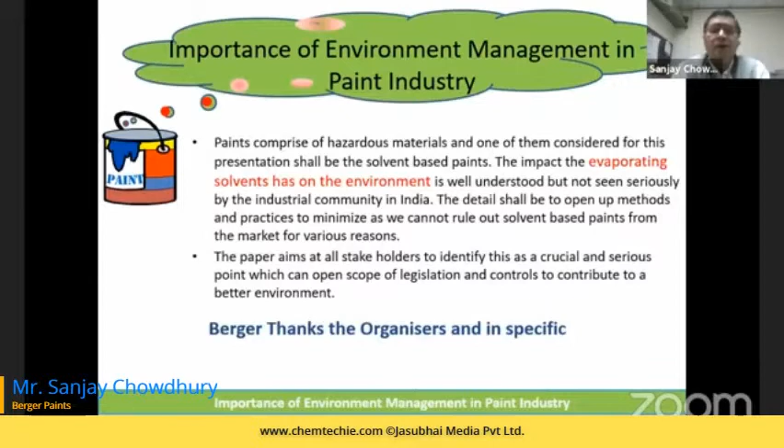In the paint industry, paint comprises hazardous material - the four ingredients, everything is hazardous, and it impacts the environment through solvents and other factors. We all know this, and now people's awareness is gradually increasing. As far as the Indian context is concerned, we are trying to remove all lead chrome based products from the paint formulation. We are moving away from that.

We are basically moving towards high volume solid products with less solvent evaporation, with low VOC, high VS products. There are also a lot of changes happening by reducing paint consumption using a high DFT single coat product, which reduces the number of coats needed. Another approach is innovation in application - using one coat or avoiding some coats while giving a similar finish to multiple coats. This leads to value innovation and protection of the environment. So the importance of paint and its impact on the environment has been discussed in this presentation.

Apart from that, we also need to understand that we do painting not only for beautification, but the main objective is protection of the surface from corrosion. The latest thumb rule is that 3 to 4% of India's GDP is being wasted due to lack of knowledge in non-mitigation techniques of corrosion.

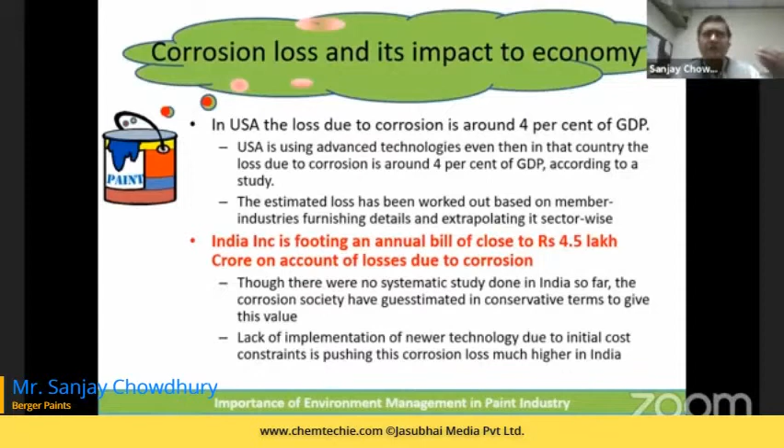That understanding is gradually coming through this type of forum and platform, where interaction is happening and people's awareness is gradually increasing.

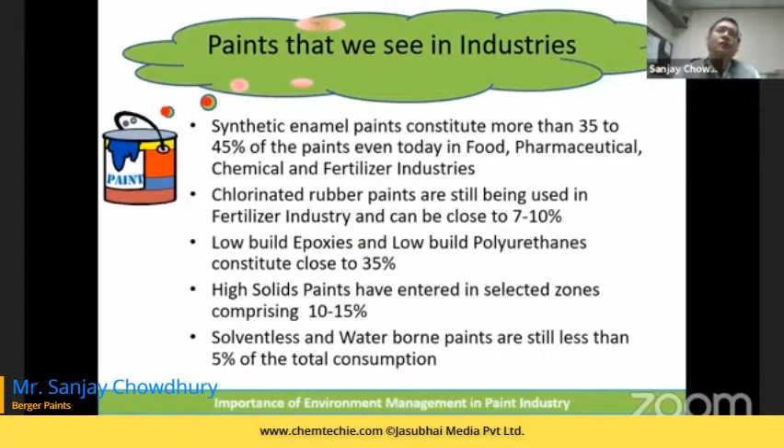So there is immense scope, tremendous awareness, and of course cost impact is also there. The Indian market is highly cost sensitive, and hence we have to seriously think about how to make it viable, affordable, and executable. So the paint industry is expected to grow.

Generally in India, paint growth is around 1.5 times the GDP growth. Till now, we have grown to the extent of 12 to 15% annual CAGR over the last 5 years, and there is a big amount of investment happening in this particular area.

Where there is a structure, there is corrosion; where there is corrosion, there will be painting; where there is painting, there will be solvent; and where there is solvent, there will be a chance of pollution in the environment. Hence we have to work together.

We have to understand and change the specification. We have to work towards the specification, and also take up with the government that this is a long term and sustainable solution, and hence we have to focus on that. Sometimes regulation also needs to be set, specifying how much VOC and other things must be there, without which it will not be allowed.

Some stringent norms, if supported by the government, will hopefully bring some changes in the industry. So paint basically comes under the red category because it consists of a lot of environmentally polluting components inside it, and hence we have to be very careful about what type of paint and what type of solvent we use.

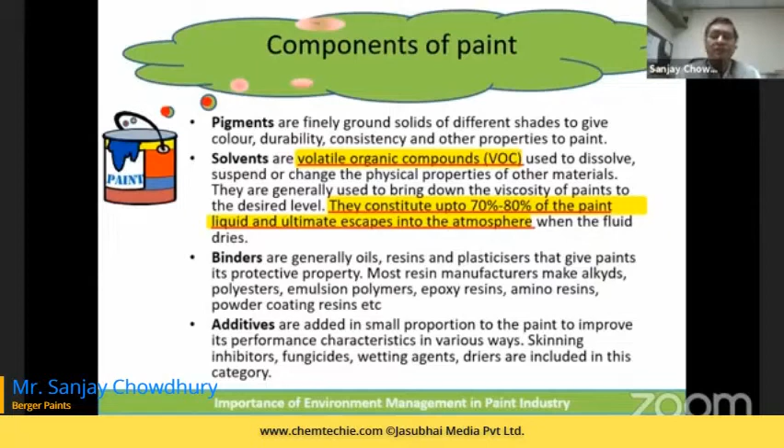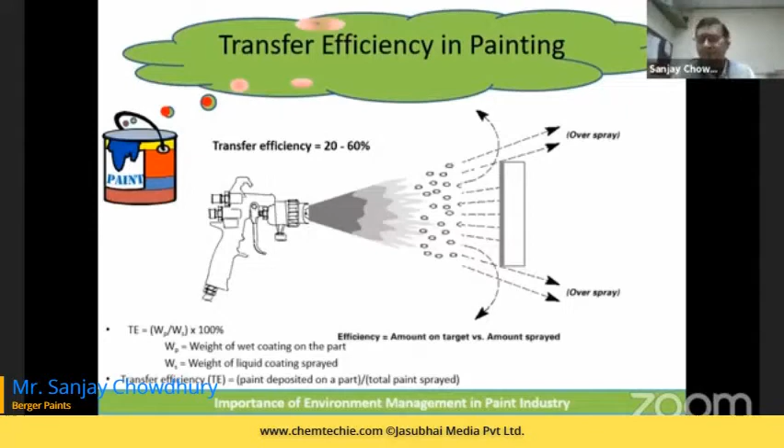Apart from the paint composition, whenever the paint is applied, how it is applied and what is the transfer efficiency, application will also play a very critical role. We have a very strong impact on the application side as well.

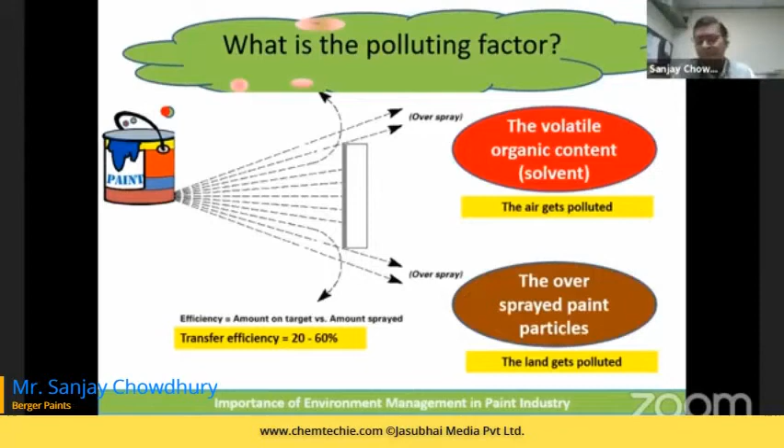So what is that factor? Basically, volatile organic compounds pollute the air, and second, the overspray of paints pollutes the land. We have to be careful handling both by using less solvent and better application technology, which will help get the land less polluted.

So these are the overall impacts: how of 100 kg of paint, 50 kg is paint solid on the workplace, and more than 50 kg goes onto the air and earth. If it is controlled, that can be managed. This also has an ozone effect.

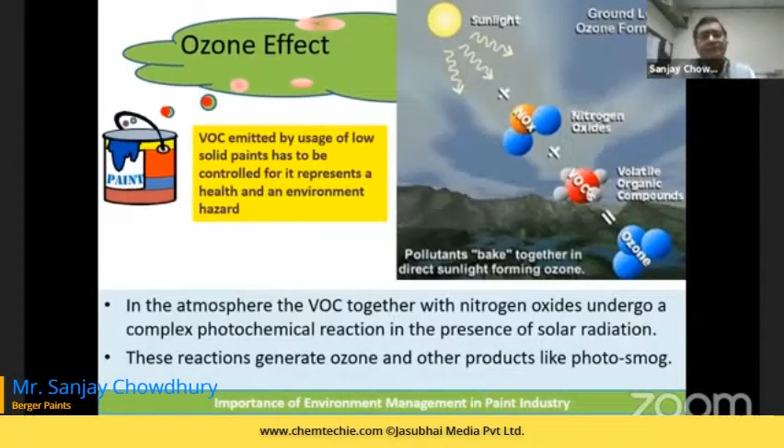The VOC emitted by usage of low solid paints has to be controlled due to its health and environmental hazards. In the atmosphere, VOC together with nitrogen oxide form a complex photochemical reaction, which is the reason for the ozone effect, which is a very dangerous thing. Hence we are all working towards addressing this.

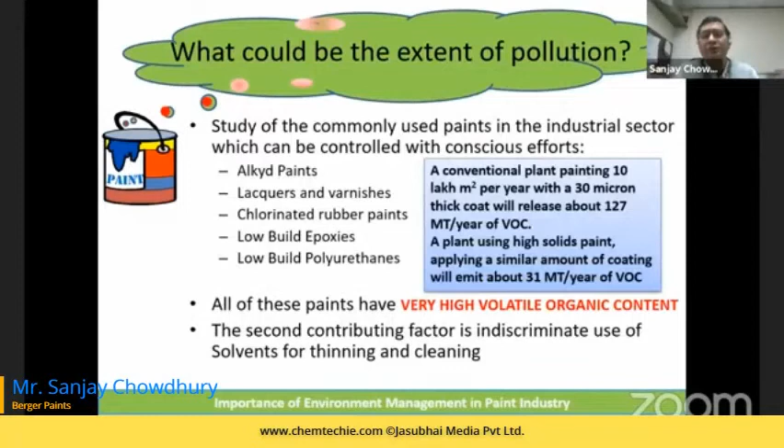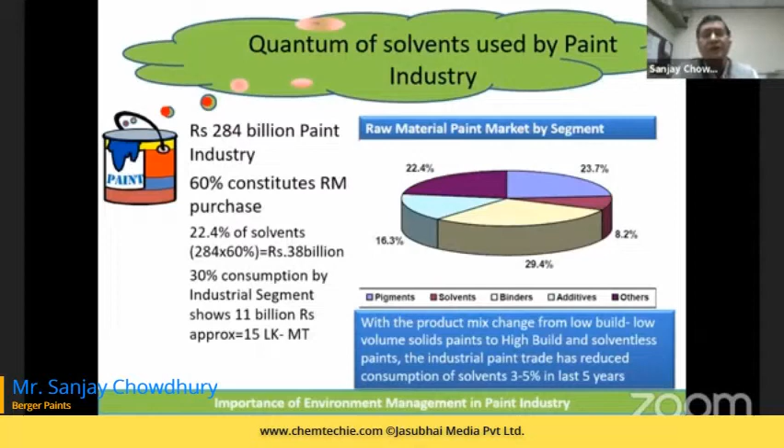We are working towards high solid, low VOC products. By and large, in the 284 billion figure, 60% consumption is composed of raw material, and out of that, 22.4% is solvent consumption. So there is a big scope for using high build, high solid, low VOC products, which will ultimately give some respite from this issue.

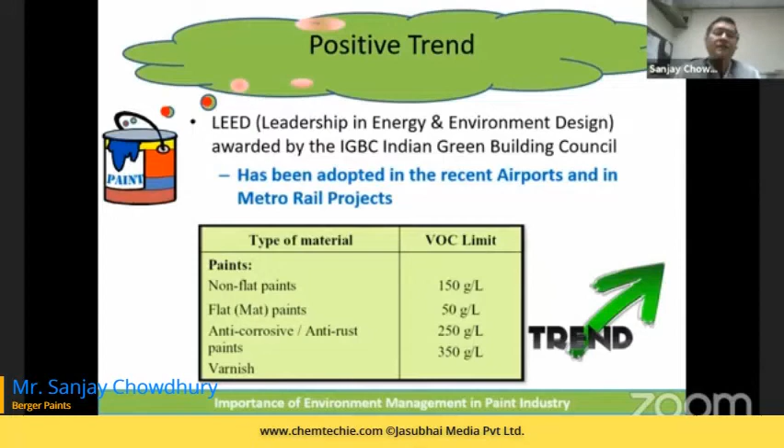There are norms given for VOC levels: 150 grams per liter for non-flat paint, 50 grams per liter for flat paint, and 250 grams for anti-corrosive, anti-rust paint. These VOC norms have been decided by LEED and IGBC Council for making environmentally friendly products.

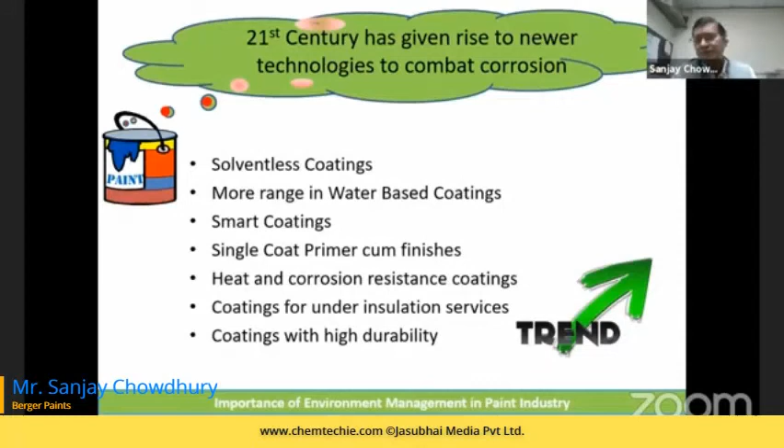So ultimately, the solutions I've already shared are water-based products, smart coatings, solventless coatings, single coat systems, coatings under insulation of services, and highly durable coatings with longer life and fewer coats. That could be the solution.

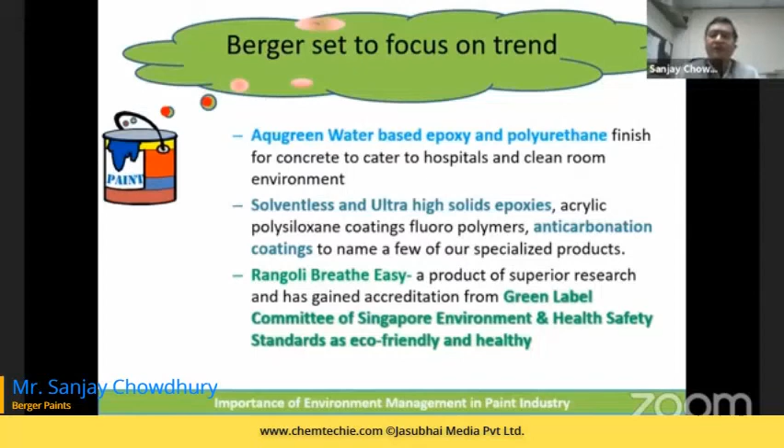What are we doing at Berger? We are doing a lot of work on Aqugreen paints in both epoxy and polyurethane, solventless ultra high solids paints, and anti-carbonation paints. Our Rangoli Breathe Easy product has Green Label certifications, Committee of Singapore Environmental Health and Safety Standards as eco-friendly healthy paints.

A lot of other work is going on, and as far as durability is concerned, it has already been shared how if you do not repaint at regular intervals, that is also a very important aspect. If paints last for a long time, pollution for the environment will be least, so durability plays a very critical role.

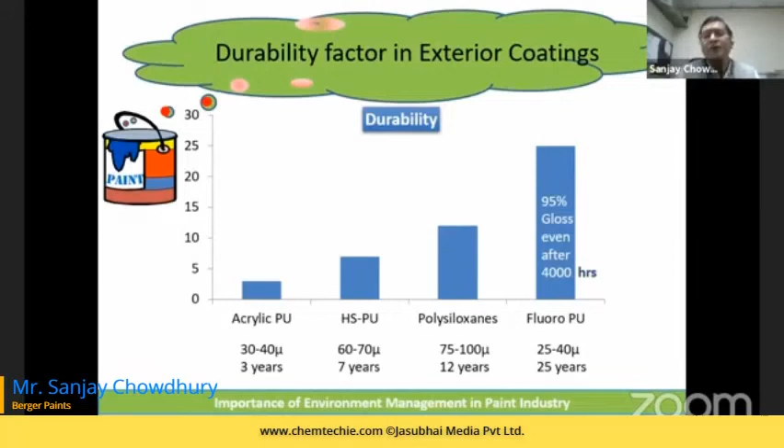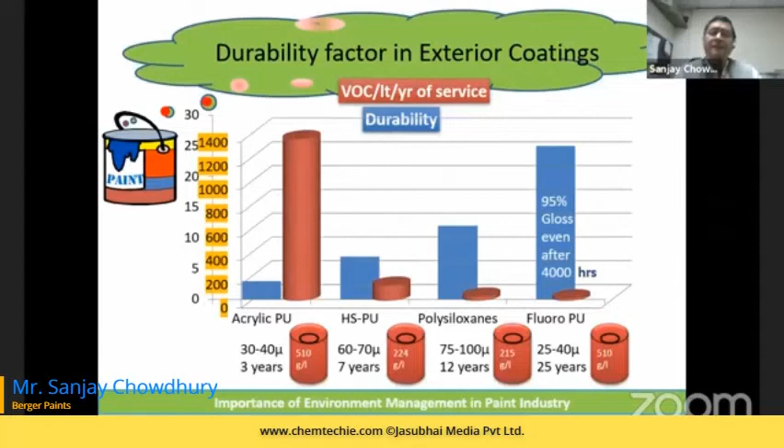This has already been spoken about by earlier speakers, so I'm not going into greater detail, but we are also working in the same area in a very deep manner, and we are taking care of durability aspects.

We have to draft a national chemical policy through the Government of India and the Ministry. REACH - registration, evaluation, authorization and restriction of chemicals - was enacted in the European Union, and we are also working along the same lines to build similar regulations, but there is a long way to go.

So with that, I would like to thank you for giving us a platform for discussing this very key aspect - the importance of environmental management in the paint industry. Thank you very much.

Thank you, Mr. Tokshi. Thank you, Mr. Sudhanshu Nagar, and everyone. Is this okay? Yes, sir. Okay.